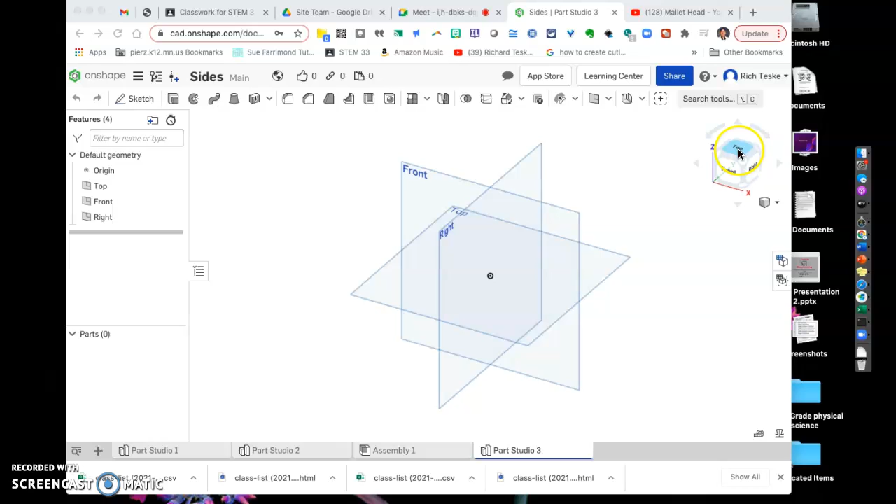All right. This is going for the pegboard. I'm going to show you how to do this. Again, sketch. I'm going to sketch here. This is what I would do.

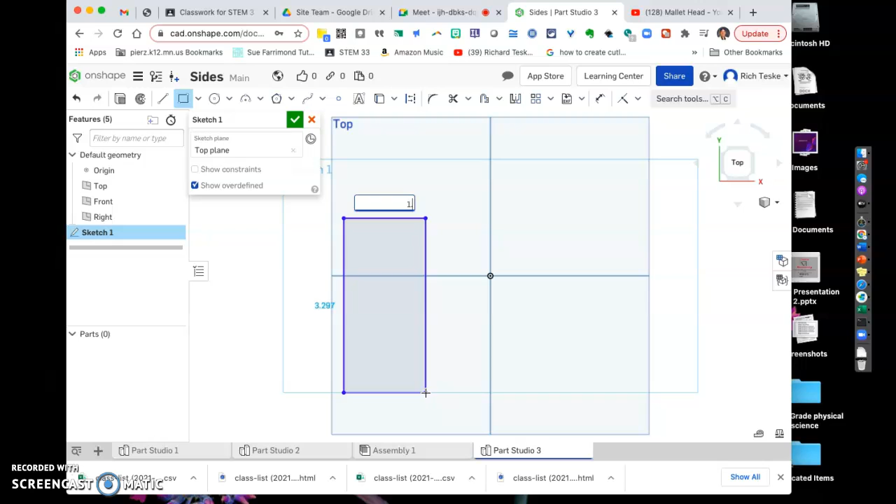I would draw a rectangle. Let's make it 1.5 by 3. And once I have that, I'm going to draw the circle here. And I'm not going to worry so much about if this is going to be perfect, but we're going to make that 0.5. And then I'm going to do the same thing down here, 0.5. Try to get them similar, just don't make them huge.

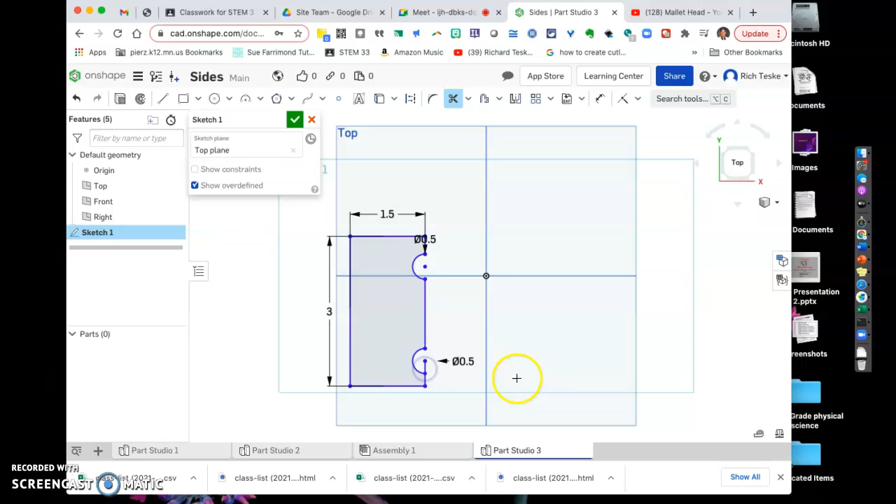Now put this all in the same sketch. Don't finish the sketch and then draw the circles. It's all in the same one. Then what we're going to do, we're going to go up here. We're going to click trim. We're going to cut that one and that line. And all I'm doing is clicking on the lines that I want to get rid of. Okay, and there we go. Once I finish it, you can see I have that.

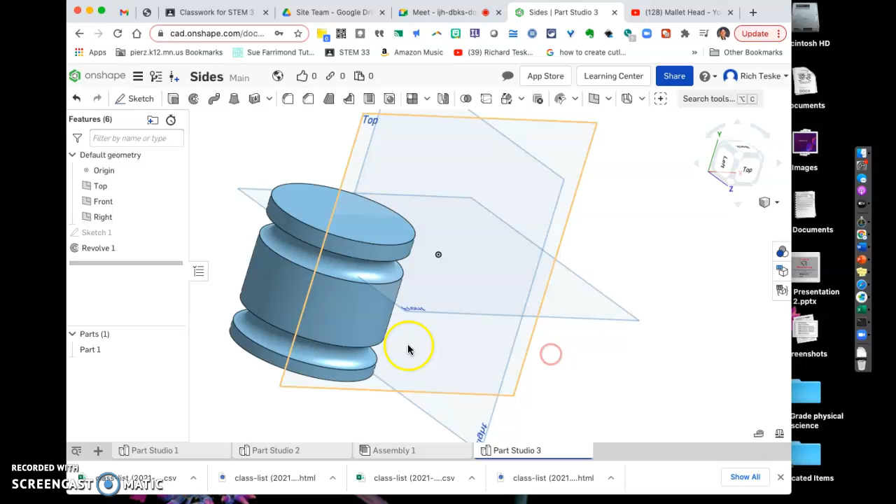Now this is where we use the revolve tool. I'm going to click on this, and then I'm going to click on the axis that I want to revolve. Okay, and there's my mallet. All right, so there's my mallet. Now to make a hole in this, I'm going to have to do a sketch.

Now everyone's going to be a little different here, and one of the easiest ways to do this is right here. I'm going to go over here and I'm going to click plane, and I'm going to click on this plane right here. Now watch, see how it makes a new plane for me? I'm going to take this arrow and I'm going to slide it. And I'm going to slide it relatively close.

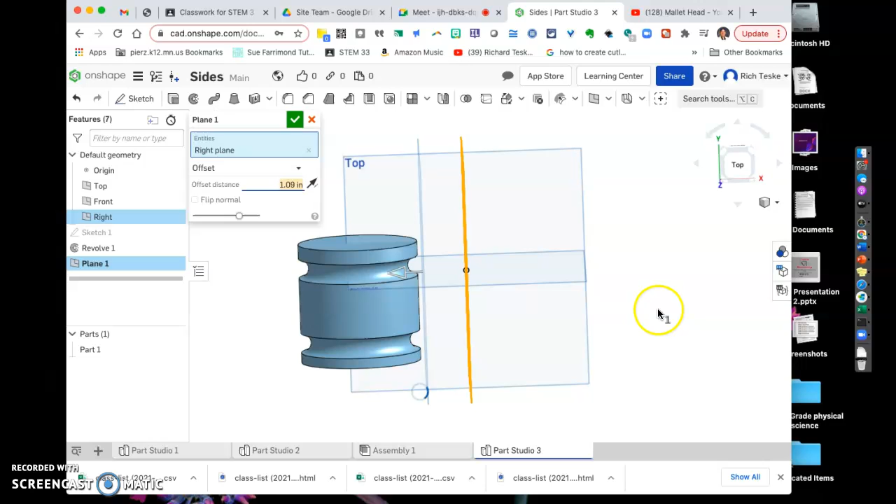It doesn't have to be perfect. You can see, there it is. And now I'm going to finish it. So now I created another plane. So then I'm going to sketch. I'm going to click on this plane right here. And once I'm on that plane, there I am.

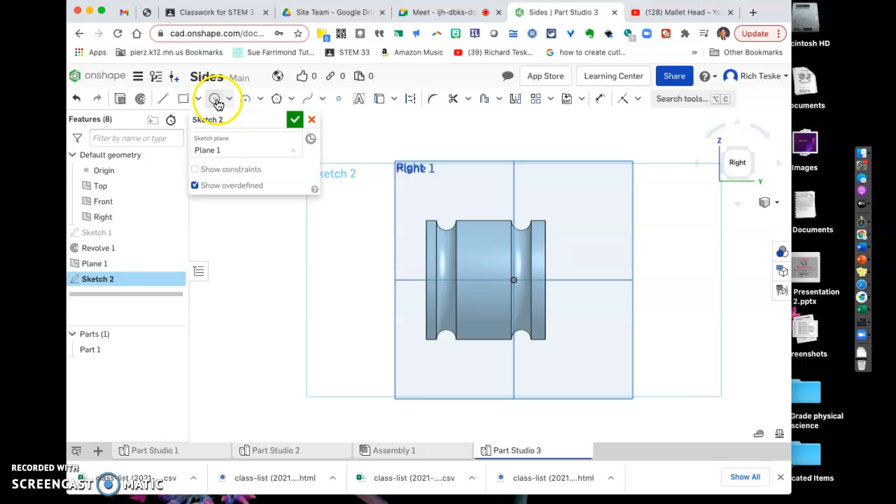I'm going to, just like you did before, couple different ways. You can draw a circle or this. I believe a circle works. And we're going to try to get it roughly in the middle. And I do a 5 divided by 8, so that's a 5/8, 0.625 circle. Click OK, and now I got that.

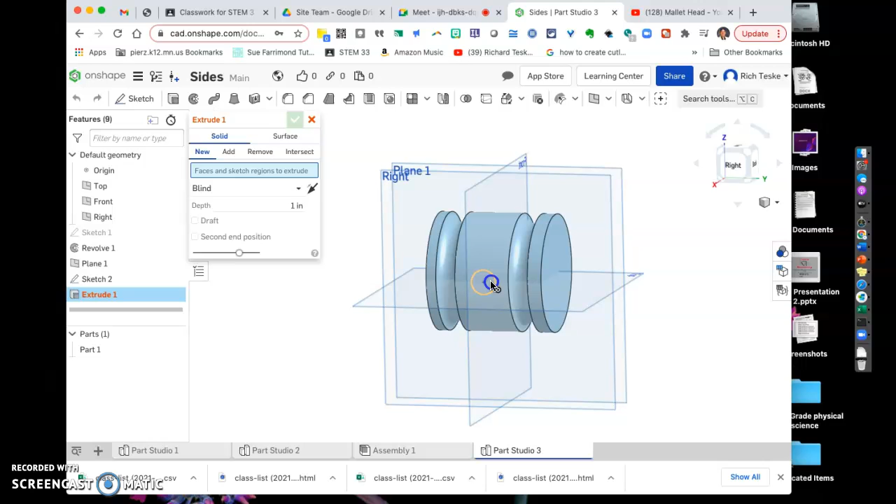I'm going to extrude it. I'm going to click extrude, and this would be what we're going to do. We're going to click remove. Now you can see I'm not going to have that run all the way through there. I'm going to run it half. And there, now I have a hole in my mallet.

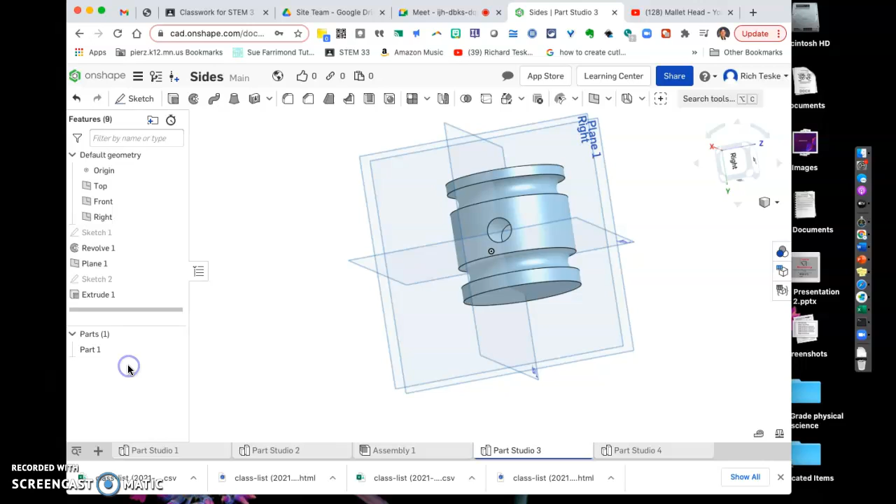Now, what we're going to do is you have to create a new part studio. This next part is really easy. So as I'm in this part studio, you can see I'm going to click on sketch, sketch there, top. Now my circle I'm going to draw is going to be 5 divided by 8, or 0.625. Okay, I'm going to finish that sketch.

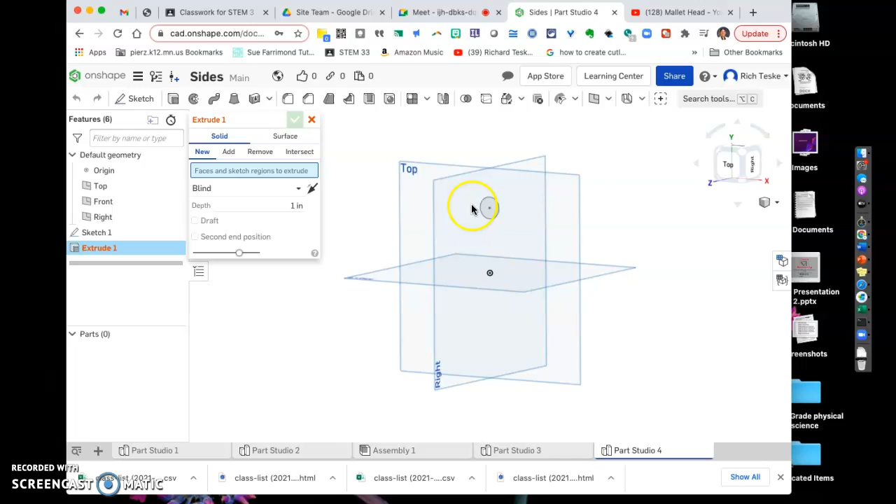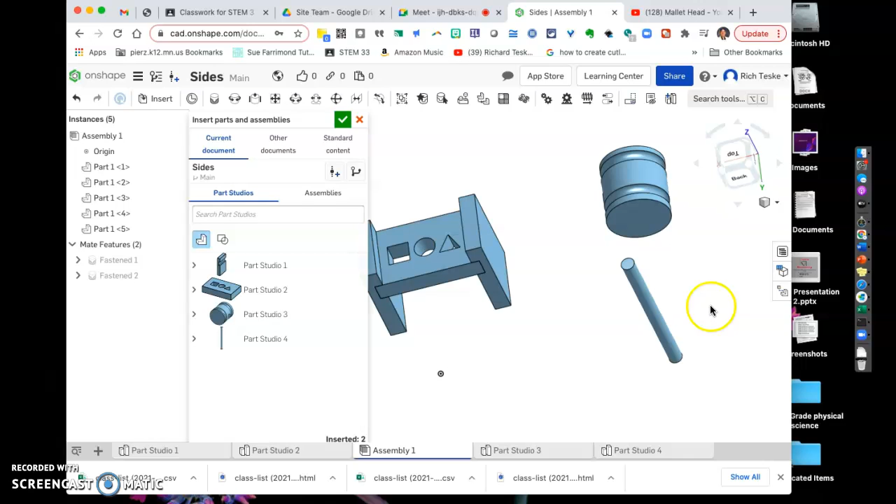I'm then going to click extrude up here, click on extrude, and let's make that, I would say, 8. Okay, and there's going to be my handle. Now what we do is we go back to this assembly, and I'm going to insert this and this like that. And once I do that, green check mark, and now I have to do this.

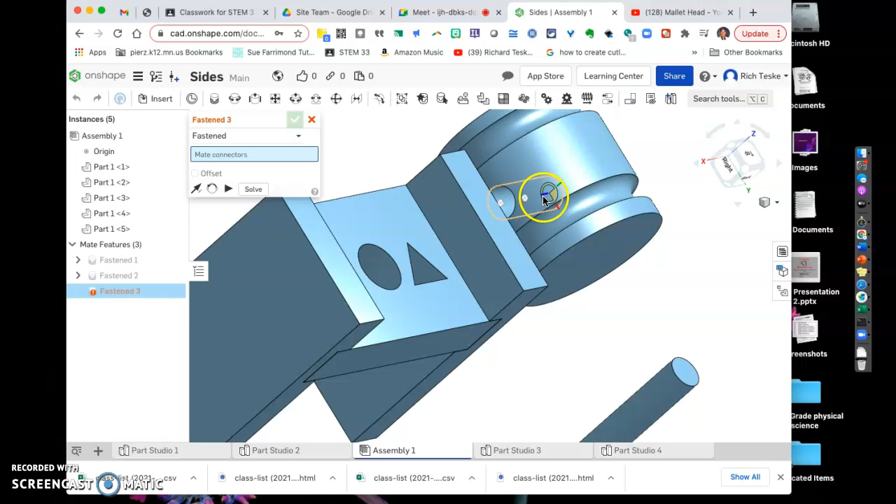I have to go fasten, and you can see here I'm going to go on the top of this and click. And I got to fasten it to this, and you can kind of see how if I get the right angle, it'll work. See there, and I'm going to click right there. There, click those two. Now you can see you're like, wait a minute, I don't want that. So you can flip it like that and hit OK. And now there is my mallet.